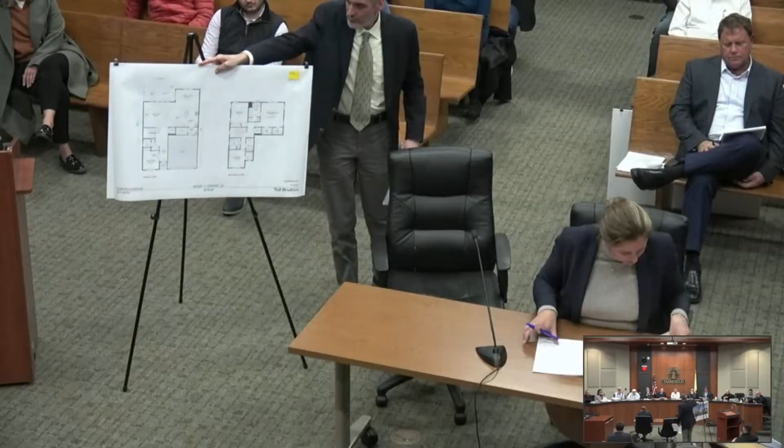Mr. Tietke, you've been sworn before, you understand that you're still under the same oath? Yes. And nothing's changed with your licenses? Right, that's correct. Thank you. It's Stephen, Stephen Tietke.

Okay, so Mr. Tietke, we had a few open items out of the October meeting that you were returning to address. The first was, I think you wanted to address the floor plan related to the single-family homes in the office area shown. Is that right? That's correct, yes. So on the board here, should we mark this as an exhibit?

It's been submitted to the board previously, Mr. King. Do you want us to mark it, or can we just refer to it? Was it A10 or A9? Model 1 primary up, there were 3 11 by 17s. What number is it? Yeah, Model 1 primary up, it said. So this was part of your plan submission from October 30th. No, this one we have here, I have to put that on it, the small version. So its revised date is 10/30/25. Right, that's correct, Model 1 primary up. Yes, that's correct. Okay, so that's the document that was submitted as part of the application, so the board should have that. Yes.

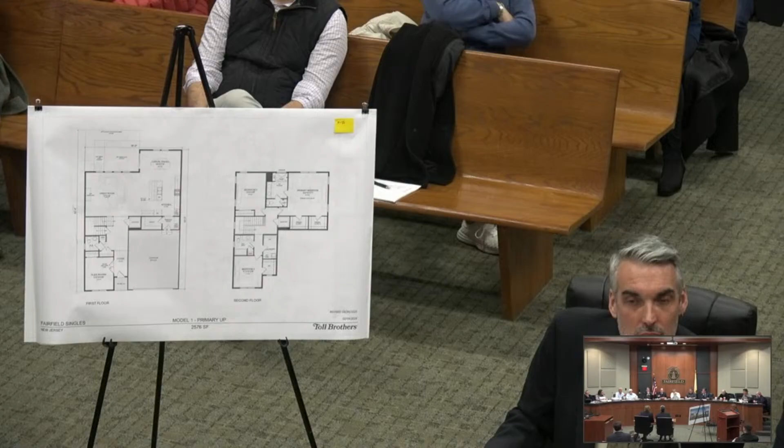Okay, I think next we had a request in October for the affordable unit floor plans, and we have those as well.

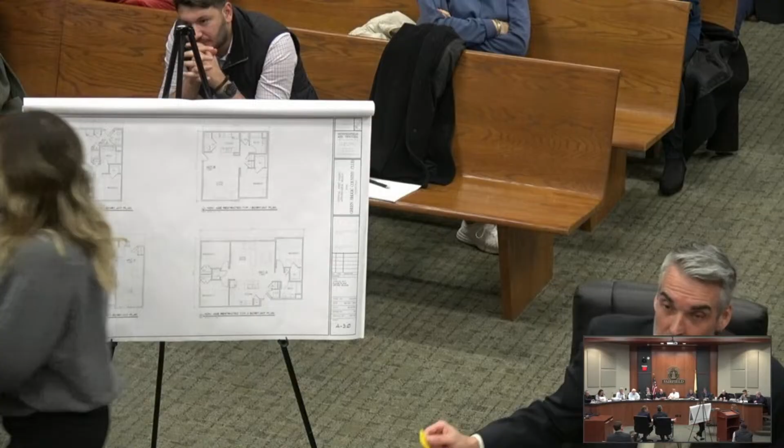So again, this is a new drawing that was submitted on October 30th, 2025. This is sheet A-3.0, entitled Typical Unit Floor Plans, Affordable Building, dated 10/30/2025. This was created in response to a request from the board members to see a layout of a typical one-bedroom, non-age restricted or age-restricted affordable unit, and then a typical 1, 2, and 3-bedroom, non-age restricted affordable unit.

So as you'll see from the plans, we picked the most prevalent unit type in each of the buildings. In each of these units, we offer an open concept kitchen, living, and dining area, a hall bath with a tub, and a dedicated in-unit laundry. This first plan, unit type A, is typical of the age-restricted building, and then B, C, and D are typical of the 1-bedroom, 2-bedroom, and 3-bedroom non-age restricted building.

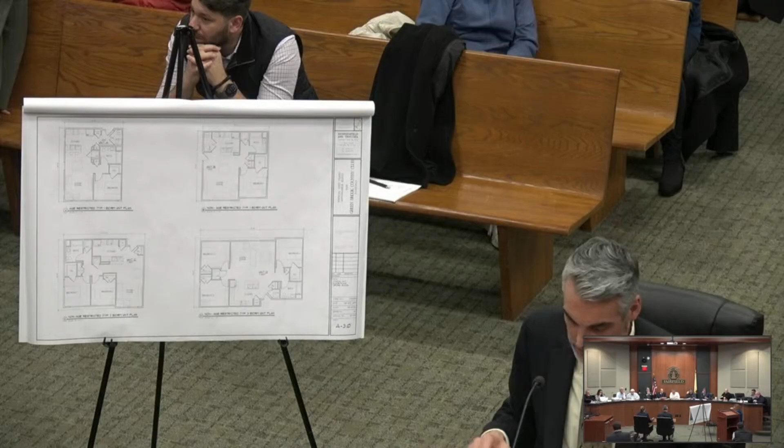Do you have a particular floor that these units will be on, the age restricted or non-age restricted? They're interspersed throughout, so typically the units will stack. This age-restricted 1-bedroom unit is typically occurring in the corners of the building. The non-age restricted 1-bedroom typically occurs in the bottom left-hand corner in stacks. This C-type unit occurs in the bottom left-hand corner of the building, and the D unit occurs in the top left-hand corner of the building in stacks.

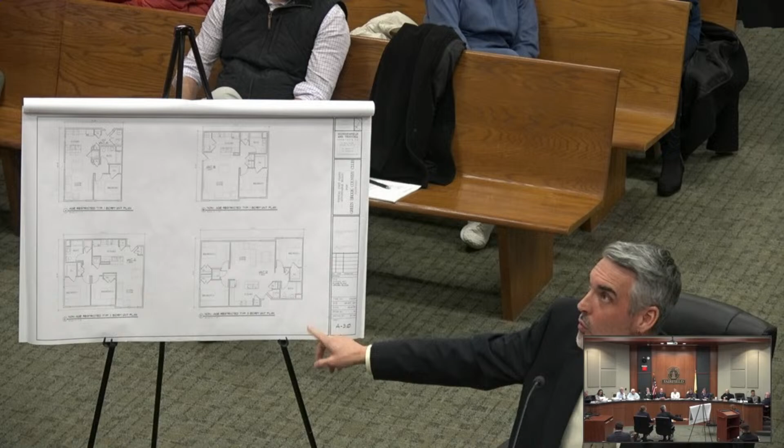Will the 1-bedrooms, non-age restricted units and age restricted units have the same amount of parking spaces? Will they have the same amount of parking spaces? I can't hear you. Could you just— That's okay, sure, take your time.

Sorry, I have to end it up. Water? It's going around, that's okay, take your time. Do you want to get a glass of water? Cough drop is making it worse.

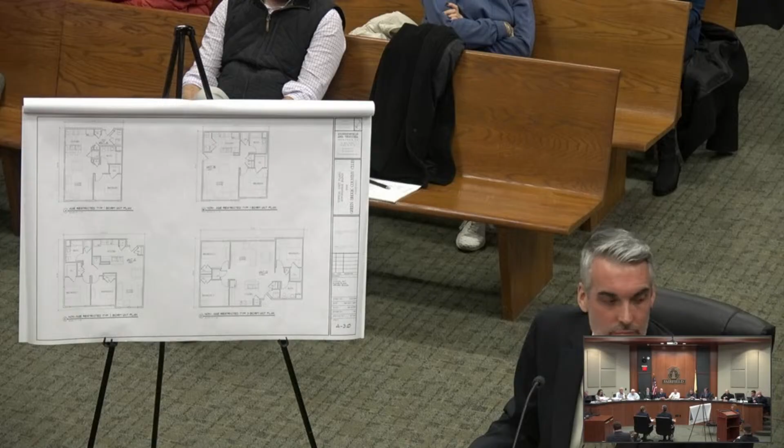Will the parking arrangements be different from the age-restricted versus non-age restricted units? I believe the RSIS requirements are the same for both. Okay. And then finally,

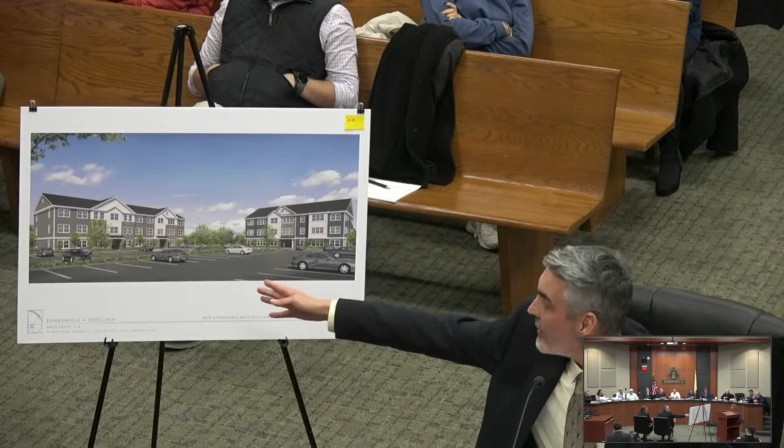Again, in response to a question from the board, we've created a rendering of the typical affordable buildings, the age-restricted building here and the non-age restricted building on the left-hand side. As you can see, this view is taken from the parking area, and it captures the front of both buildings. We've incorporated materials consistent with those used on the single families, which include horizontal siding, cultured stone, and board and batten siding. What we've done in these buildings is emphasize the entrances by creating some plane breaks and taking the accent materials up to the roof line and adding some gable details.

We've also incorporated some metal roof accents over the entry areas to really emphasize those entrances. The other thing we've done is pick two complementary siding colors to differentiate one building from the other. The continuing theme between the two is the stone. So the stone selected is the same for both buildings, and the board and batten color is the same, but the siding color differentiates between the two.

How many elevators would be in each building? The non-age restricted building does not have an elevator, it's a walk-up building. The age-restricted building has one elevator in the center. That's 3 floors? This is 3 stories, yes. So the age-restricted building will have an elevator, the non-age restricted building does not.

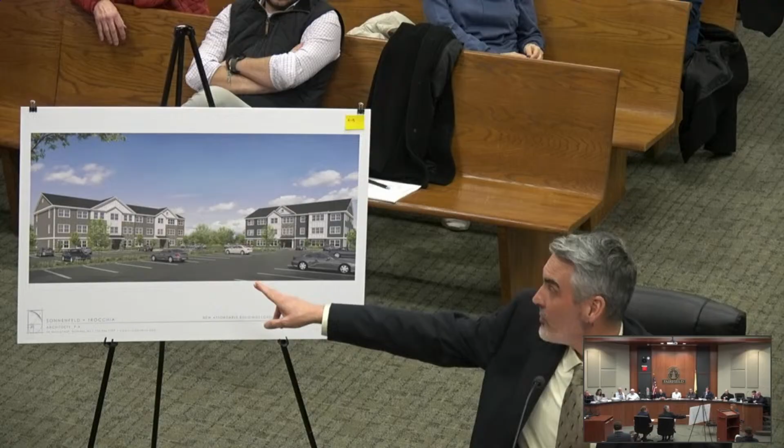In the non-age-restricted buildings, which are to the left on the sheet, there are two entrances, and at each entrance there are mailboxes built into alcoves underneath the cover before the entry door. To address parcel delivery, in the opposite alcove on this side, we plan to provide a locker where parcels can be delivered for residents to then pick up.

So that was comment 5F in Mr. Petrie's memo. Wait, where was it? It was comment 5F as in Frank. What page are you on? Hang on, let me check. Sheet 8, 5F. Hold on... okay, thank you.

And then stick with us because we're staying in that same section. Comment G was asking about the anticipated location of mechanical equipment for the apartment buildings. Could you touch on that as well? Sure, there will be air conditioning condensers required for the units, and those will be located at the sides and rears of the building, screened from view with landscaping.

Comment H asks about amenities for the apartment buildings, and that was testified to in September, with the explanation that there are no amenities for the apartments. Question I in the same section asks who will own, operate, and manage the apartment buildings, and that will be Woodmont.

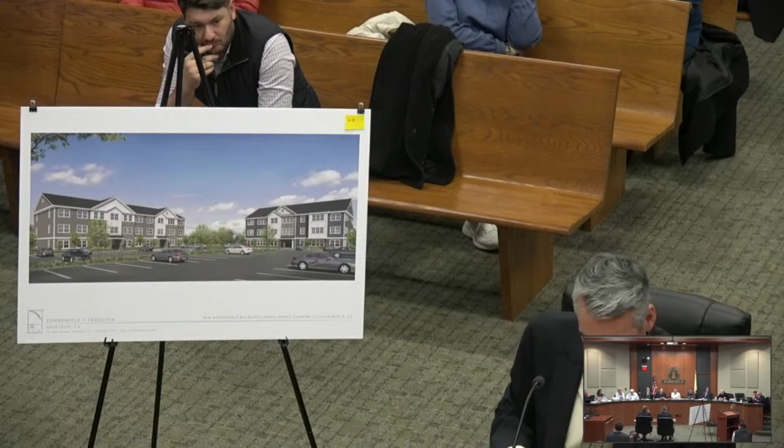So if you need to, will that affect your number of parking spaces, if they ask you to eliminate two, one for each building? That would be a question for the engineer. Let me make a note so I make sure we cover it.

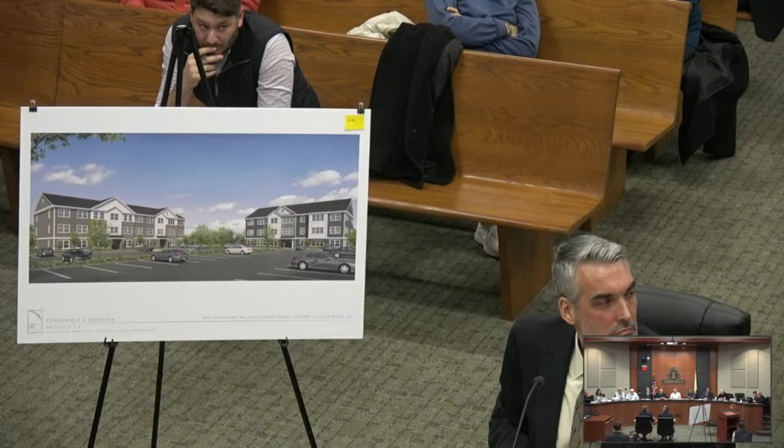Are the apartment buildings contributory to the HOA? Meaning, do they have to pay a fee to the HOA? Is that the question? That is the question, yes. No, they just pay rent to their landlord.

Okay, so the property owner will not have to contribute towards roadway improvements in terms of will the landlord, the owner of the building? Yes, that's what I meant. I'm sorry, I misunderstood your question. So let's do it both ways because it'll help to be clear.

So if you're a tenant in one of the affordable buildings, you are not obligated to pay into the HOA in addition to paying your rent. So that's baseline number one. I believe there will be an agreement between the owners of the different parcels, meaning the HOA association and the owner of the affordable parcel, to deal with contribution associated with the cost of maintaining roads, snow plowing, and utilities. Yes, correct.

But wait, there was more we needed to cover. Right, Mr. Petrie, you also had a question in your memo, letter J, asking about how waste and trash will be handled. Can you explain that? Sure. The trash will be taken by the residents either down the stairs or the elevator in the non-age-restricted or the age-restricted building, and brought out to a dumpster at grade.

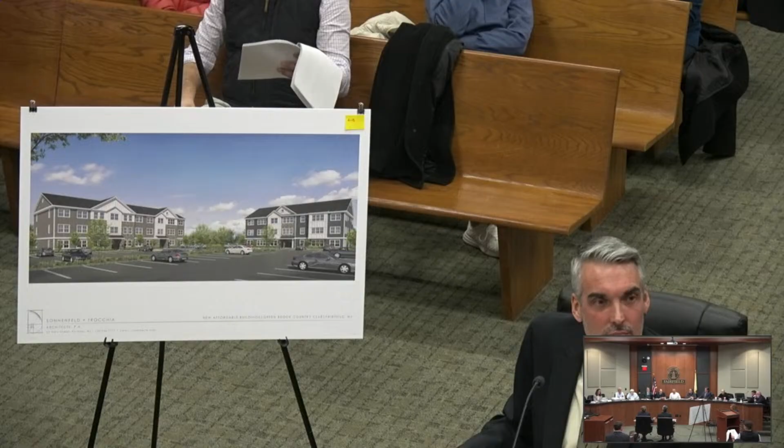So the person who lives on the third floor has to carry their trash down the stairs outside to a dumpster? Yes. Really? That's correct, yes. These are some buildings. And is that pretty typical in your experience? No, it's not pretty typical, because my mother-in-law lives in one.

They have a trash chute. Yeah, there's nobody walking down the stairs carrying garbage out. I'm gonna be quite honest, especially in an age-restricted building, it ends up sitting in the hallway. I mean, you gotta be kidding me.

Age-restricted has an elevator, James. Oh, big deal, you get on the elevator, then you gotta go outside. And you throw your garbage out, dripping it all the way. This is unbelievable. It really is.

Again, I will tell you, it's very typical, particularly for affordable buildings. Maybe in Woodmont, but this is crazy. This is crazy to have to do that. In this day and age, you're designing the buildings, you couldn't design a trash chute?

Well, with the trash chute then comes a trash room, and comes personnel that have to manage taking the garbage out of the building trash room. But you're building brand-new, beautiful apartments supposedly, so wouldn't you- Affordable apartments can't be subject to cost-generative measures.

Affordable apartments. They're not all affordable apartments. They are all affordable. There's a mixture here. They're not, sir. They're all affordable apartments.

Okay, even still, because they're affordable, they have to carry their garbage out? That's like, I'm not gonna use the word, but you're basically telling me that's what it is. I'm telling you, because they're affordable, we don't have to do that. They'll carry their own garbage out, don't worry about it. Okay.

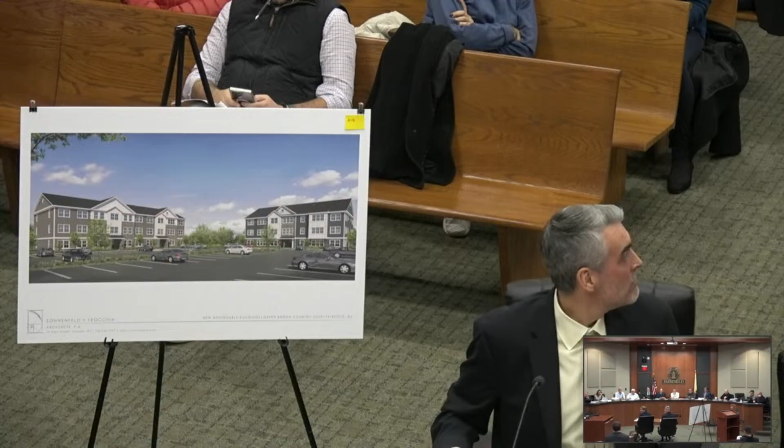And obviously the trash dumpsters are a distance, a bit up from the building. Those are shown on the plans, and we can put them proximate, but in inclement weather, these people are expected to go and do that. And they're enclosed, so they gotta struggle with the gate to open it, then struggle with the lid to open it. It makes no sense to me. It really doesn't. Sure, we have someone from the landlord here who can explain it more if you'd like.

Sir, if you could raise your right hand. You swear or affirm the testimony you're about to give before the board is true? I do. And for the record, can you state and spell your name?

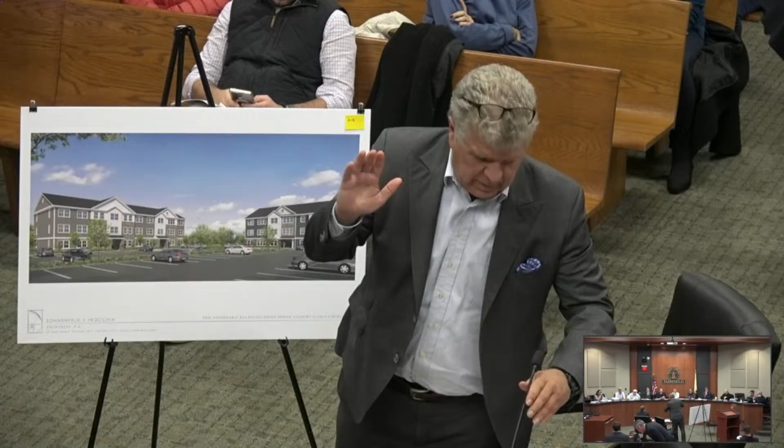Sure, I'm Steve Santola. I'm the Executive Vice President and General Counsel at Woodmont Properties. We own, manage, and develop between 3,000 and 4,000 apartments in New Jersey, New York, and Pennsylvania. And you're fully familiar with the operation? Fully familiar with the operation.

This is what's known as a garden-style building. We build two different styles of buildings. His testimony is as a fact witness, as an operator of these buildings. That's correct. And I'm referring to what's marked as A13. So this is what's known as a garden-style building that we have built literally thousands of units in. Not one of them has a garbage chute.

Whether we get $4,000 a month in West Windsor or whether we get $1,200 a month at an affordable building, in some buildings we provide a service where people can put their garbage in the hallway and they pay extra for that. You can't do that with the affordable resident, so you can't charge them. So they take their garbage downstairs and put it into the dumpster.

We have downtown buildings where you have a core of a building and the HVACs and all of it's very different, and then we oftentimes will provide a trash chute. Usually they're mixed-use buildings, so the garbage goes down and in with the retail at the base. But I just want to make clear, we're not putting a burden on an affordable resident here that isn't the way most of these communities operate. I will grant you that certain types of buildings with cores have garbage chutes, but it's more the exception than the rule in this style of building.

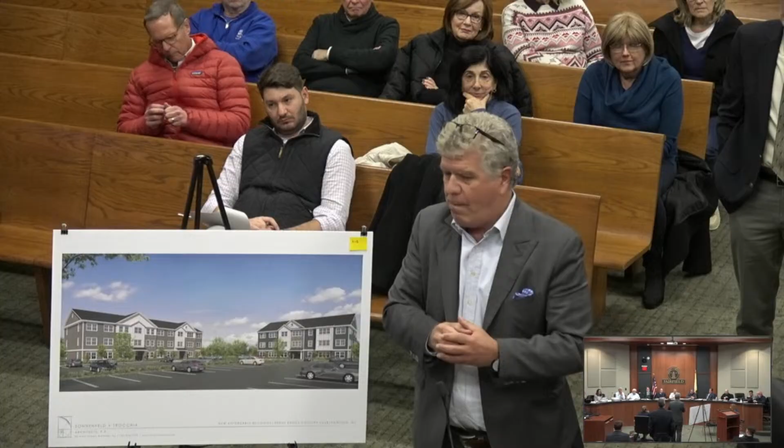Thank you. Any questions for the property manager?

The last item related to all of this, in Mr. Petrie's memo, was item K, regarding how move-in and move-out will work. Mr. Tiki, do you want to cover that? Typically, I think the biggest push for move-in would be at lease-up, and as time goes on, move-ins become much less frequent and are usually manageable by the management staff to coordinate.

My understanding is that move-in and move-out is coordinated with management so that, for example, you don't have multiple people moving in at the same time impacting parking. Instead it's scheduled to make sure there's as little impact as possible to the parking lot function.

That was all I had for Mr. Tiki to cover, but we're happy to have him answer other questions. Any questions from the board? No, other than I think there should be assigned parking.

Any questions from the public, for the architect? Seeing none - were there any renderings done from the adjacent properties based upon the meeting we had in the field? I believe Mr. Cruz has those. We were intending to show them this evening. Shall we transition to Mr. Cruz? Transition, Mr. Cruz. Okay.

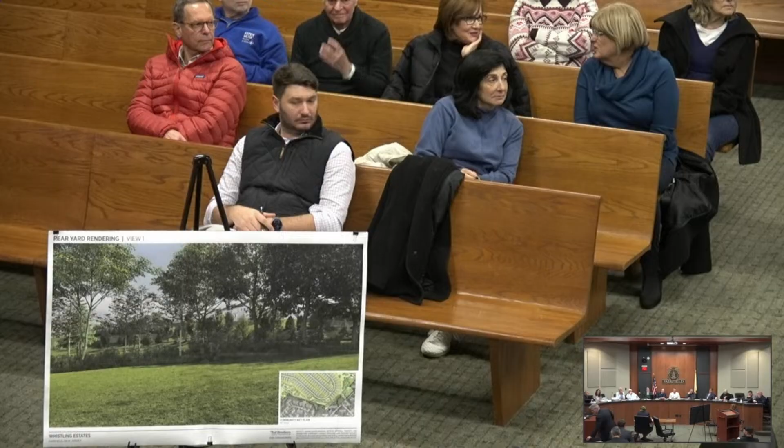Mr. Cruz, before you sit down, could I ask a question - is that the same rendering there? You have two of them? Yes, they're both the same. Okay, can you put that on that easel so Sterling Green could see it, please? And before you get rolling, you need to respond to Mr. King's question that you understand you're still under oath. Yes, sorry, I thought - yes. And your licenses haven't changed, just so we have that on the record. That's correct. Okay, still valid. Let me know when you're situated.

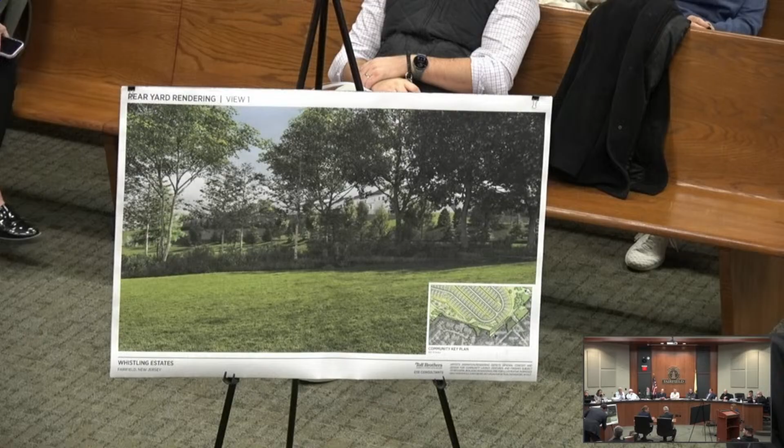Sorry. It's okay. My little pointer. Okay, so - yeah, that makes more sense over there.

Mr. Petrie, I think you provided the perfect transition, because the first thing we wanted to talk about with Mr. Cruz was that he had a meeting with folks at Sterling Green and extensively revised the plans. As part of that, he prepared views from Sterling Green showing what the plans, incorporating those revisions, would look like. Why don't you walk the board and the public through what those are?

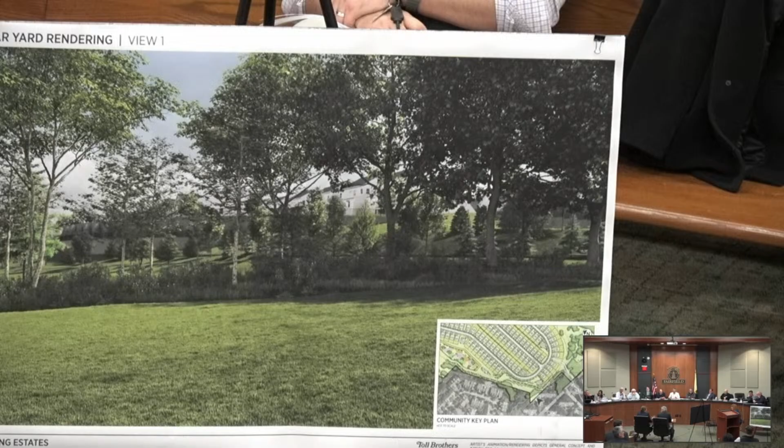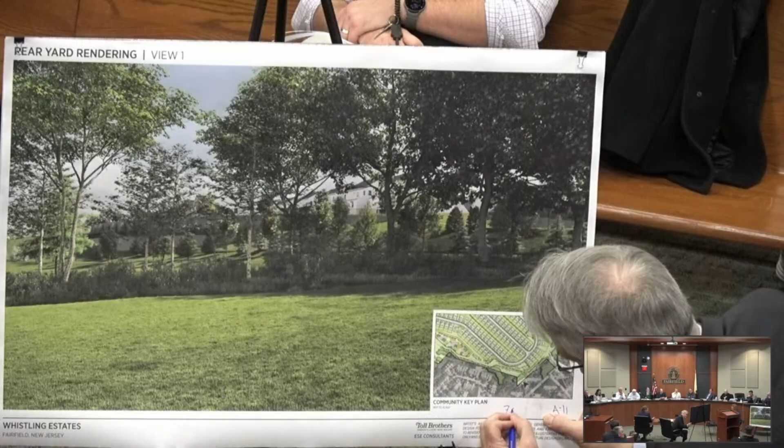Thank you. All right.

Okay, so tell us what we're looking at here with A11, please. So A11 includes renderings of the views from the properties surrounding the western border, mainly Sterling Green and Lot 11, which we heard at the last meeting were concerned about the proximity of walls, view shed, and how things were going to align along the common property boundary. We rendered 7 different views, and I'll go through each one on each different sheet, starting with view number 1.

View 1 is basically taken from the rear of Lot 11, looking towards the now revised grading and home situation and layout that we had agreed to work on and is included in the new plans that were presented to the board. You'll see this is essentially the view shed from the arrow, if you look to the lower right, that's the vantage point taken from the rear of Lot 11 into the development, looking basically northward. This is the overall rendering with vegetation.

The walls now have been reduced, and there's only walls located along the roadway. Those walls have been reduced to a maximum of 7 feet high, 2-tiered walls. They've been removed from the proximity next to Lot 11, and also the one home we mentioned earlier, Lot 58, has been relocated away to provide more space and distance between Lot 11 and the interior of the development.

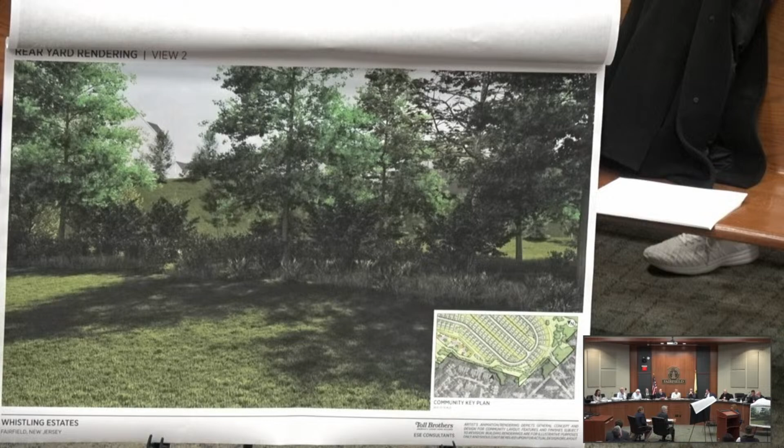So that is view number 2. As we move on to sheet 3.

And again, for these units, the closest distance roughly between the new unit and the existing townhome unit is approximately 180 feet.

Just for clarification, those are mature trees that are there now that we're looking at? Yes, these trees here are renderings of the mature vegetation that is there currently. Thank you. And they're currently there. Yes, correct.

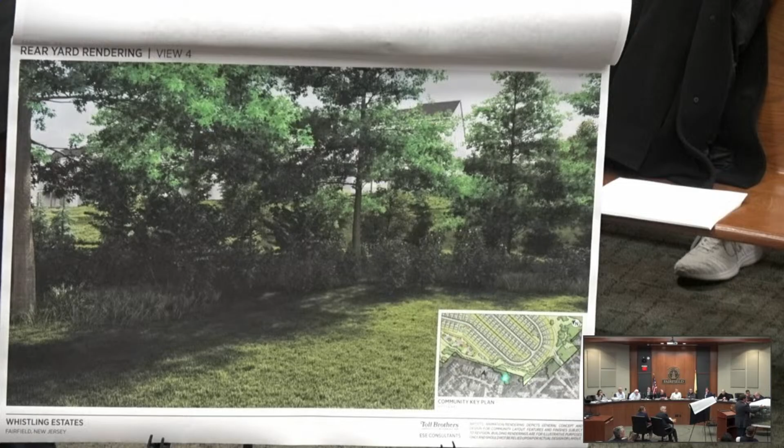Okay, so that's view 3. Going to the next sheet is view 4, as you continue further northward, getting closer now from 69 Schindler Way to 61 Schindler Way, the rear area. Again looking at interior development, as you can see here, no walls, just grading to make up the grade differential between the rear of the Sterling Green property and the interior of the development.

Could you explain, so the people from Sterling Green know, what you're planting in the 20-foot buffer, are you planting evergreens? Yeah, there'll be a mixture of evergreens and deciduous trees, but mainly more evergreens to provide year-round screening.

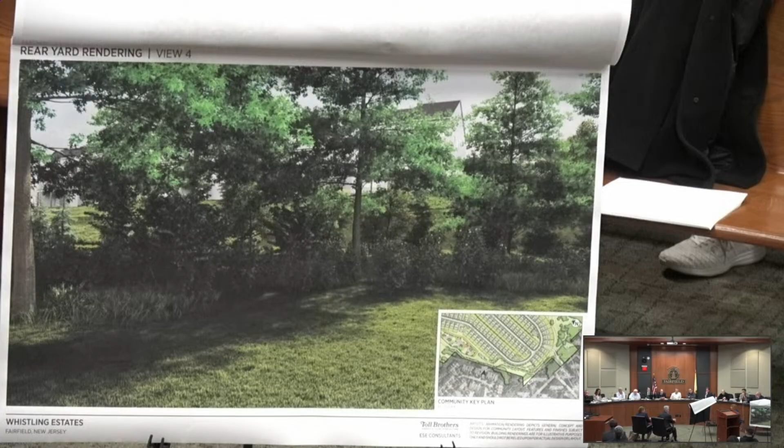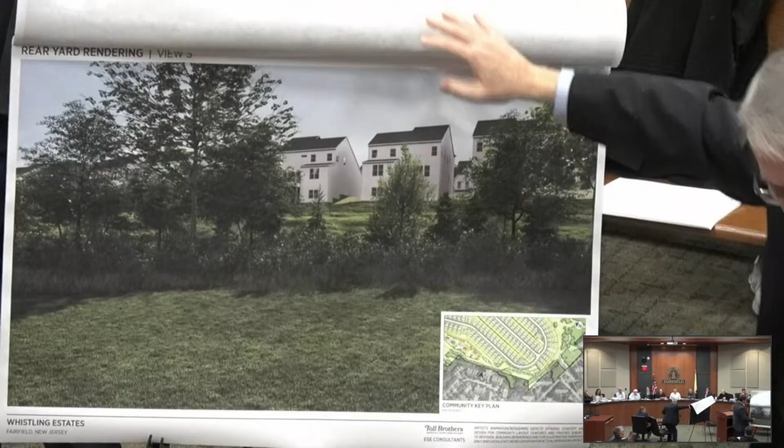Moving onward to view 5, this is getting closer now to the end of the building at 63 Schindler Way, the northern end. As you can see, some of the existing screening dies down in that scrub area we were looking at, so there's a little more visibility of the homes being proposed. But the distance here is growing greater, and again no walls, the grading is lower, and it takes into account mature vegetation that remains, along with new plantings in that 20-foot area I discussed.

So what we're looking at now will be screened so we're not seeing those houses as predominantly once the plantings are done? The plantings are included, this right here is proposed plantings within that 20 feet. Obviously they're not mature yet, so as they grow the screening will increase and create a better visual buffer. What size and kind of evergreen is that smaller one to the left? Those are typically spruces or pines, planted at 6 to 8 foot height.

Is it possible to put larger, more mature evergreens in areas that are more sparse, to help it along? We could look at more mature plantings, but there's also availability and height limits. 12 to 14 feet is kind of a maximum height you can normally get from a nursery. We can look into what species are typically available in this area and try to supplement with a higher height installation. Thank you.

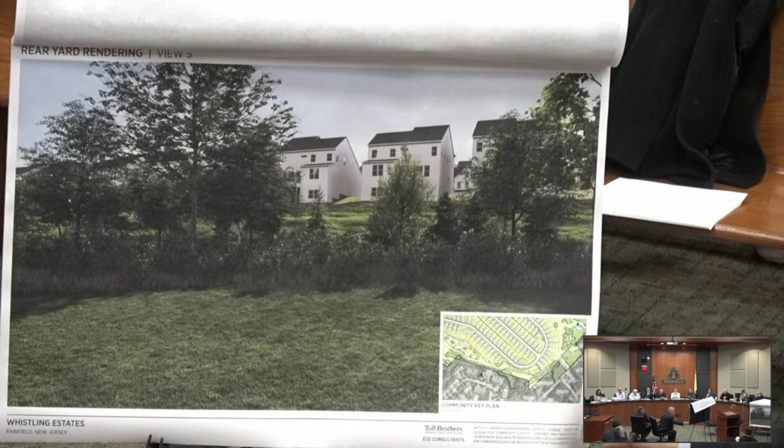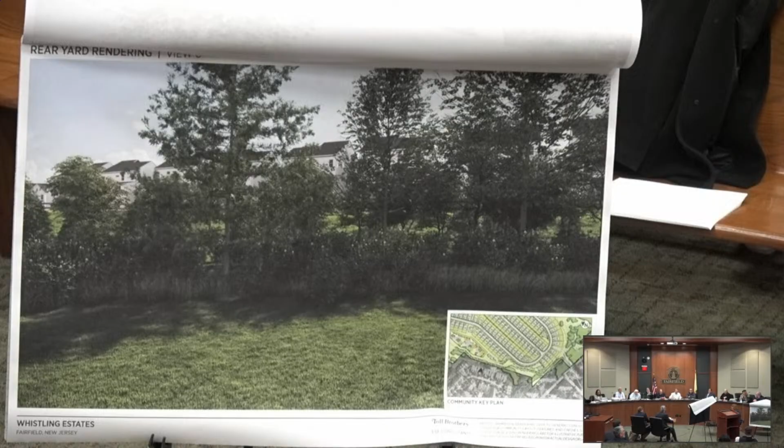Next, view 6, as we continue moving down. This is in the area of 53 Schindler Way at the rear. This is where the existing vegetation and buffering exists again, not in the open area, and it's supplemented behind with the additional landscape buffer in the 20 feet from our toll property inward. Again you can see there's no walls, they've been removed, and the grading is now basically just natural lawn at a typical slope.

Behind those trees is a proposed retention basin. That's the proposed bioretention area, correct? For now.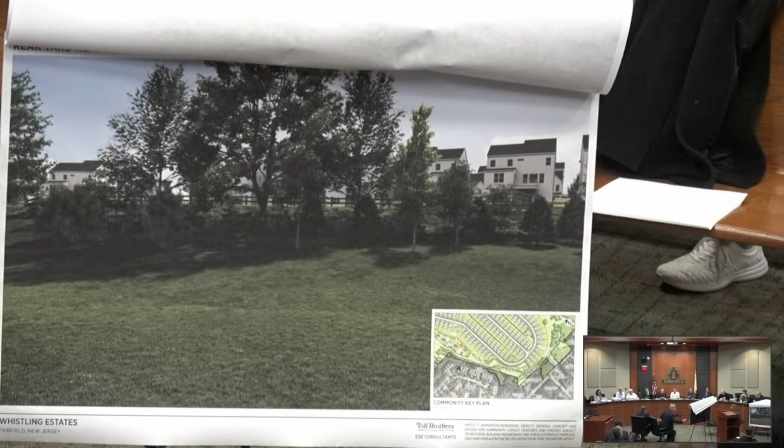That was our view 7, right? Yes, that's the final view. Okay, so do we have any questions about the screening and Sterling Green?

I guess there's gonna be a landscape plan, correct? Yes. And that'll be sent to the planner to review? Yes, the landscape plan with this proposed buffering was included in the recent submission. There's different sizes — some of these screenings, the newer plantings will be a larger variety or a variety that grows a lot quicker. For more open areas, I think it's obvious you need a little bit taller, bigger plantings.

Yep, so we hear you on that. So what's depicted here is on the landscape plan that was submitted, but hearing the mayor's and Mr. Gasparini's comments, we'll augment that with the taller plantings. Right, and it may be something too where it may make sense to agree to work together when we're in the field.

Because it may be that we want to deal with the existing conditions and say, we need a big tree over here. So it may be something where we have ongoing coordination going forward to make sure that we're getting the tall trees in the right spots.

Yes, and also, if Sterling Green does agree to allow you to clean up that area, you may want to do bigger things anyway, because you may be removing stuff that leaves a gap. So I agree, it's something that should really be looked at in the field, but you have agreed to deal with the size differentials based on the conditions.

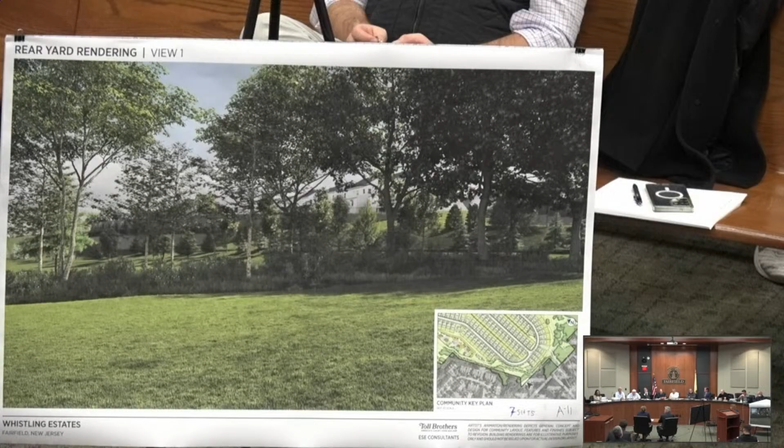So let me pause you there. Mr. Cruz, that's the first phase of site work on the property. About how long do you expect that first phase of work to be done? That would roughly take between 5 to 7 months to get set up. This may be confusing since we talked about phasing before in terms of building the homes, but this is phases prior to the homes being built. This is just the site work that has to go in before you can build any homes. Is that right? And do you have proposed construction hours?

Do you mean in terms of when work will be done on site? Certainly we would comply with your ordinance with respect to noise, et cetera, but I'm not sure we've gone beyond making sure we would comply with your ordinance at this point. But you will, of course, abide by whatever ordinance we have? Certainly.

And the 5 to 7 months of this infrastructure build-out, is that in conjunction with North Caldwell, or is that separate? That would most likely be in conjunction with North Caldwell, because that initial phase would also include the stormwater measures at the border between North Caldwell and Fairfield, to counter their flow and capture it before it flows further into the Fairfield portion. So in a perfect world, at the end of 7 months, the roadways would be in on both developments? Portions of the roadways—not the entire system, just the portions for phase one and where the stormwater, sanitary, and water infrastructure flow through.

In your entire preparation phase, are you not using the bridge for construction vehicles? Correct, Old Mill Road Bridge will not be used for construction. The proposal is for construction vehicles to come in through the main entrance to the golf course, where there's a temporary construction access between both developments used just for construction during the overall initial phasing and installation of utilities and stormwater. Once that work is done between both developments, that temporary construction access goes away and becomes utility access for the sewer connection between the communities.

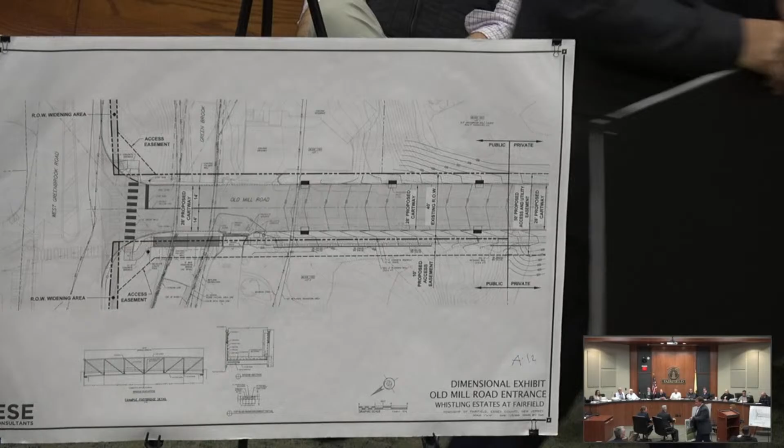This exhibit consists of just one sheet, so it'll be A12. This is a dimensional exhibit for the Old Mill Road entrance. It looks very familiar to a prior exhibit we had with coloring showing how the road was going to be expanded. This one is more to go over the dimensions, because we talked about widths required to meet RSIS standards and right-of-way widths where public-private right-of-ways end and start. We wanted to make this more graphical to depict and explain that as we go through the exhibit.

Referencing Exhibit A12, the Old Mill Road Bridge had a minimum width of 27.5 feet between two abutments at one end. We're going to talk about the width at 28 - we propose the cartway at 28 feet and adjust the abutments and redeck the bridge so that we can maintain 28 feet through the entrance off West Greenbrook, and 28 feet will continue inward towards the proposed project.

At the edge of the exhibit, you'll see where I noted the public area versus private. This line, several hundred feet into the former golf course property, is where the public right-of-way for Old Mill Road ends, and past that would be a private right-of-way, a private roadway system with a 50-foot right-of-way, but private.

Knowing that we have a 40-foot right-of-way for the existing Old Mill Road public area, we're going to propose a 10-foot access easement along the northern or northwestern section to make that a 50-foot area where you can do roadway improvements, including sidewalk and the footbridge we mentioned earlier. That 50 feet would then match up with the proposed 50-foot internal private right-of-way. Mr. Petrie did have a comment in his memo, and we agree that the easement would be dedicated to the HOA.

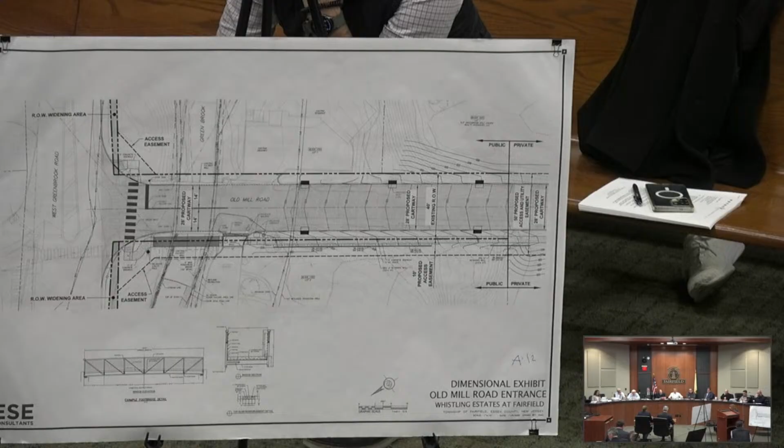Okay, I think from there we had planned to just touch on the updated memorandum we received from Burgess Associates. In that memorandum, there was commentary about a potential variance related to the emergency access.

Oh, that reminds me, Mr. Cruz, do you have the updated emergency access easement that shows the access going out to the roads? Oh yes, sorry, yeah. And just while he's getting it, as a reminder, when we were here in October, we had shown a truck turning radius showing the emergency access easement, and the question from the board was that we show the access going all the way out to the roads. Right, so this is the updated exhibit, and this is going to be A13.

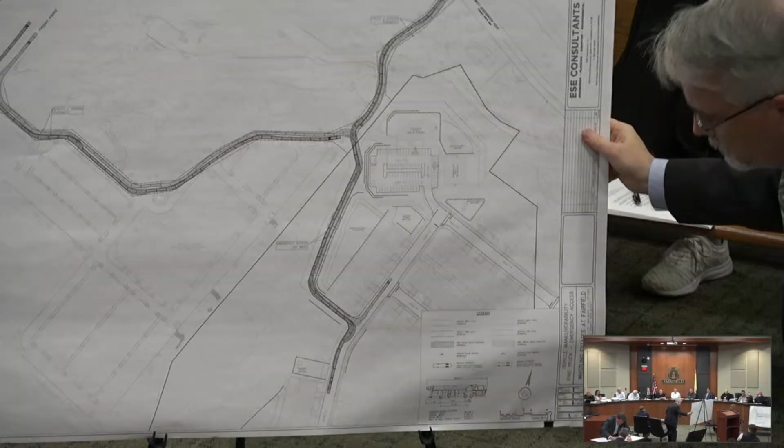All right, I've marked Exhibit A13, and as mentioned, I wasn't here at the previous meeting, but this is an expansion of the prior exhibit where we had shown the fire truck maneuverability through the access of the new access from the interior development now, which is basically, if you're looking at the bottom right-hand section of the exhibit, this area here is the Fairfield portion of the project. Now to the left of the exhibit, going out to the upper left-hand corner, that's Passaic Avenue, leading basically from the office park internal to the actual project.

We had cut off the exhibit before it's gotten through the entire access drive of the office park, or the continuation of the access drive, which leads basically northward out to West Greenbrook Road. So we just extended the vehicle maneuverability to show the functionality through those two areas, and it continues to provide access for the fire trucks through the existing office park and from West Greenbrook Road interior to the project.

And the property owner knows this could possibly be an option that's going to happen in case of an emergency? Yep, so there's an existing emergency access easement today as between these two parcels, and the property owner is aware that we would be looking to continue that emergency access easement.

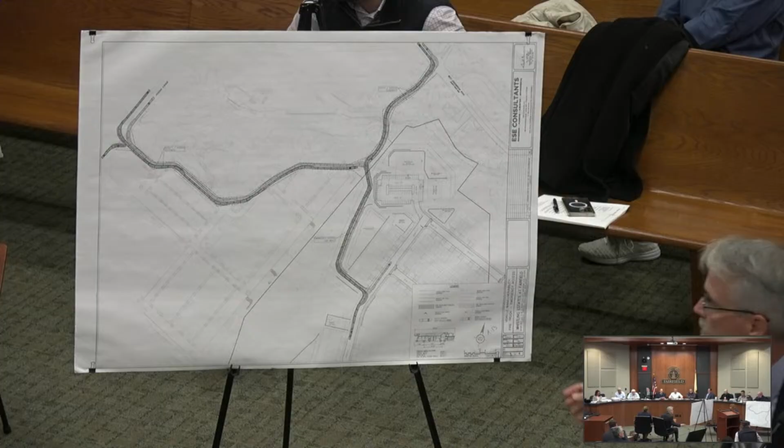There was also a comment asking about parking associated with the single-family homes. So, Mr. Cruz, each of the single-family homes has a two-car garage as well as a driveway space for starters, correct? Correct. And then in addition to that, there's on-street parking available, right? That's correct. Okay.

What is the requirement for a three-bedroom home as far as parking on premises? Three-bedroom home is essentially 2.4 spaces per unit. No, that's the apartment, I'm talking for a single-family home. So how do you know how many parking spaces based on the number of bedrooms for a single-family home? Is there a calculation for that? Yes, yeah, there is, sorry, I just got to get it. Yeah, no problem.

Sorry, some of this stuff doesn't come to the top of my head as I get up in age.

For a three-bedroom, single-family home, RSIS standard requires 2 spaces per unit. That's the requirement from the standards. You have 4 spaces, 2 in the garage and 2 in the driveway, but RSIS won't allow full credit for 4, it says 3.5. So we only get credit for 3.5, plus there's also on-street parking as well.

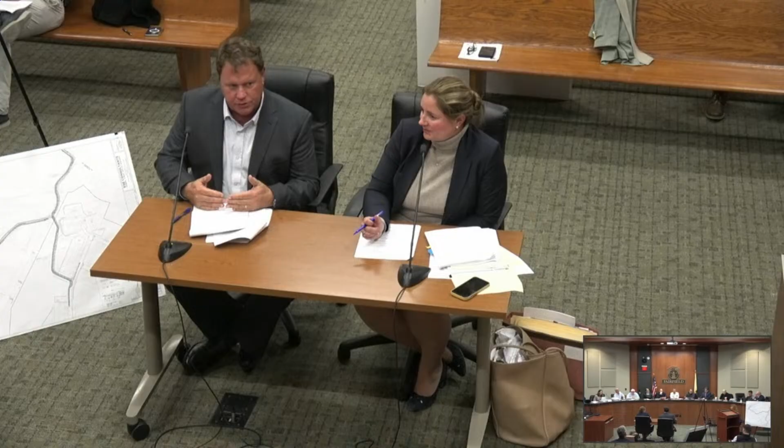So again, we appreciate your collective time. The farthest thing we're trying to do is frustrate anyone. But it's important that I understand - we had a lot of discussion early on, a lot of back and forth about what the requirements will be for Mr. Petrie and Mr. Cruz as it relates to the DEP, to come to an understanding so that this board's in a position to accept or reject our testimony and move forward on the application. I'm totally unclear on what that result is, so can somebody just confirm what's going to happen? I understand Mr. Petrie's going to draft a letter that we'll get an opportunity to review, along with Mr. King I believe, that will go to Mr. Contoy down at DEP with his assertion about whether the property has been in a meadow condition or a maintained condition. Am I right so far?

And we're also going to include North Caldwell in on this conversation. Okay, but we'll get a chance to look at that because as was alluded, we've got to all be on the same page in terms of the question. The question has to be asked in a format that's appropriate, right? So I'm good with that so far.

Okay, letter goes down to DEP. We hear nothing because a formal application has not been submitted because we don't have an approved plan from the municipality, which is usually the key to all conditional things that get resolved later. What happens? How long would you all think is reasonable for us to wait for the DEP, who's undergoing regime change soon, before we can come to an understanding for the board to be able to have sufficient information and comfort to act?

Well, from my perspective, a statute was read today by our engineer. To me it was pretty concise of what the requirements were, gave difference of types of a meadow as opposed to a golf course. I don't want to be biased, but I'm kind of leaning to the board's expert as to his analysis. So I think my recommendation to the board would be, based upon that statute, based upon what the engineer stated, that this is the requirement.